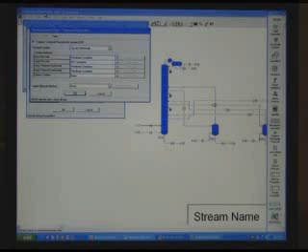Okay, so let's go back to my slides. I don't know how many more I have.

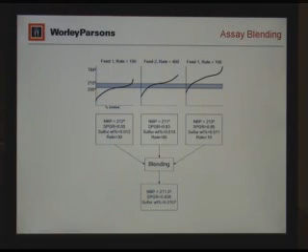So we talked about blending, and this is how it works. Amy just brought up a very important point - she said to be careful. If you do blending in PRO/II, it won't actually blend your viscosities very well, and actually it won't even blend them, I think, if you have more than one assay. I wasn't aware of that, but if you need to do something like that, call me and I'll contact SimSci. She has an open support case with them for a long time now on viscosity prediction from blending assays. It's not doing it well, and I think I read somewhere that they're using a really old API correlation to do the viscosity prediction, and API doesn't even recommend that method anymore. So be careful if you do need to look at viscosities.

So when do you not want to blend? We talked about how it would blend everything together and make you one set of cuts, but when do you want to just keep them separate as separate sets of pseudo components? The main thing is you want to differentiate between the properties. Like if you have a really light stream and a really heavy stream, you don't want to combine them and make one medium weight stream because it won't represent either of them well. So the example I gave here is if you have a low sulfur stream and a high sulfur stream, the blend would be like a medium sulfur stream, so it doesn't really make sense - it won't represent your low sulfur or your high sulfur.

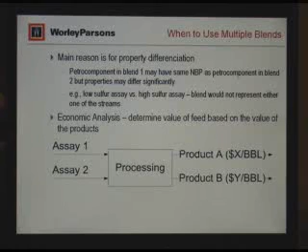The other reason is if you want to do some economic analysis, if you want to track what happens to this feed and when it makes the products, you'll see you'll get X dollars per barrel for this assay and then Y dollars per barrel for that assay. But if you were to blend them into one set of pseudo components, you can't keep track of that because you don't know where it came from. So those are some of the reasons why you don't want to blend.

Okay, so that's the assays part. Any other questions on that? I know it's a bit strange if you haven't seen it before.

Yes, the refinery typically provides us with this. Yeah, they would pay a lot for the labs to run these assays.

And I think back in the 80s, we used to have a folder with West Texas Sweet - it would have this TBP, and we had Oman and Bintulu crudes. We used to have a library of TBPs for all these well-known crudes. I don't know if we still do. Helmi, do you know? Is he still here? Okay, but yeah, we used to have a big old file cabinet, and you go through, and he was like, okay, West Texas Sweet has this, and you just pull it out and start looking at it, and we used to plot it and see if there's anything weird in that curve. But yeah, the refineries will usually provide you with that, and then you would put it in.

Okay, so we're going to talk about the column now. It's kind of a strange jump, but since if you do enter an assay, you probably will do a distillation to break it up into different products.

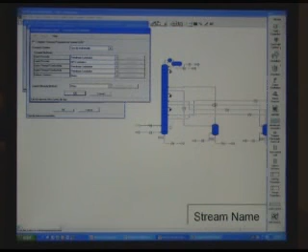Okay, so for PRO/II, let me just show you what it looks like. This is a column, a distillation column, and you can have multiple feeds on any of these trays. Like here they have 3 pump arounds and 3 side strippers. So it's hard to control right now.

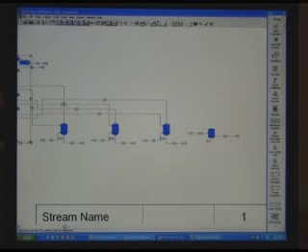And you can even have a feed furnace - we'll talk about that, model like a flash zone. You don't have to have a condenser or a reboiler - you could just have, say if you have a liquid extraction column, you just want 2 streams going in. But for crude columns, you usually do.

Let me go back to the slide. So all the stages are at equilibrium, and your reboiler is your last stage. The way PRO/II numbers it is: the condenser, if there is one, is stage 1. If not, the topmost tray is stage 1.

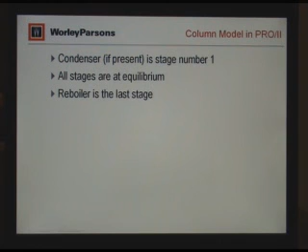This gets to be a little mathematical. There are 5 algorithms for it to solve the distillation column. There's an inside-out algorithm - you basically have 2 matrices, one inside the other, that's why it's called inside-out. The inside matrix gets solved first, and then it'll come out and solve the outer matrix.

You can't do total pump arounds on that. Total pump arounds means you take all the liquids off a stage, pump it around, and feed a stage above it, so no liquid goes to the tray directly below. You can't do that directly, but there are tricks around it. For example, you could have just one mole of liquid going to the next tray to simulate that.

If you have any vapor-liquid-liquid equilibrium columns, like extraction or azeotropic distillation, you use the ChemDist algorithm. These are just algorithms, the mathematical methods it uses to solve the column. It's not really about the types of column it has.

A column is just a bunch of trays that you lay down to simulate your distillation. There's also a SURE method. I don't know why it's called SURE, but it uses the Newton-Raphson technique with matrix partitioning. I don't know exactly what that means, but it's just Newton-Raphson, I think it has to do with root finding using some Taylor series.

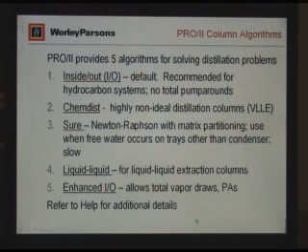Okay, so those are the basics. There are about five basic ones that you would choose from. Okay, so our given design is going to determine which algorithm we use, right? Or do you guys model it differently?

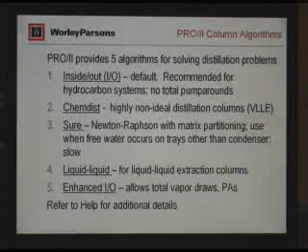No, your design will just have you set it up a little differently. In terms of Pro/II, you would lay it down and put in, if it's an existing one, whether you have trays or packing. But the algorithm is just something you pick to have it do the math, to calculate it. It's kind of, how do I explain this... it's like when you give it the specifications and all this information, it'll take those and make equations out of it, and then try to solve it.

The design is what determines how the equations are put together and run. The design, you do in terms of specifications, and depending on the degrees of freedom of the column, you can have X number of specifications, and it'll need to vary things like duties and draw rates in order to meet the specification. So yes, that does come into play that way. But these algorithms are just the math it uses to solve the columns, though yes, it is dependent on how you set it up.

But by default, it uses inside-out, and then you can go choose any of the other ones to help it solve. A lot of people just run it with inside-out, and if it doesn't solve, they'll say, oh let me try this. It's just a mathematical method to solve these matrices.

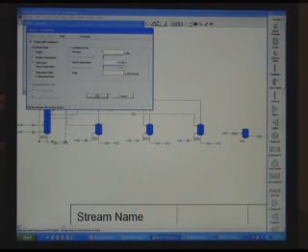So these are the required inputs you need for the column. The first time you lay down a column and drop it on the PFD, it'll ask you how many theoretical trays or equilibrium stages. That's what theoretical means. Sometimes people are picky, and if it's theoretical you should say stage, not tray, since tray is like actual. So sometimes I mix them up. But theoretical means it's always at equilibrium.

You also need to give it a pressure profile. If you're doing tray hydraulics, it'll calculate for you, but you need to give it a lot of information. You need to tell it what kind of feeds are going in and what kind of products you want out. Then specifications, like if you want an endpoint for a product, or C1 through C4 content, or RVP of a stream, or cetane index, any of those refinery inspection properties could be used as a specification.

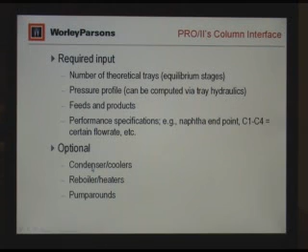And you don't have to have all these in a column. You could, but you could have condensers or coolers, reboilers or side heaters, and pump arounds.

Let me show you really fast. I'm just going to put down a column.

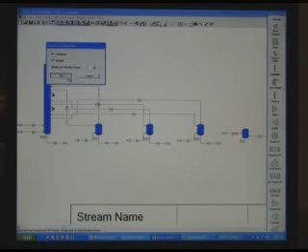So basically, you just pick a column, and then you need to give it a number of trays. Let's just say 10. And then you would feed it to, say, any tray. The way you draw it doesn't really matter. Like right here is 1, 2, 3. Looks like I'm feeding on tray 5, but it's not actually that until you go inside and tell it where you're feeding it.

And the product here, just for simplicity. You'll see that the pressure profile is red, so I need to give it a pressure profile. It could be overall, or you could give it tray by tray. So I could say top tray pressure is, I don't know, 50 pounds or something. And then you could have pressure drop per tray, maybe like 1 pound or something.

I'm just making this up as I go. Or you could give it the pressure drop for the whole column, like a big delta P. So if you say delta P is 20, then this will be 50, and this will be 70. So the pressure is higher at the bottom, so it goes up.

And you could also, if you do it by individual trays, then you have to do it here, like tray 1 is this, and tray 2 is this, and so on.

And feeds and products. So right now, as I mentioned, I just drew it so it feeds in the middle of the column, but it really doesn't know where I want to do it until I tell it here. So I could say feed it on tray 2 if I wanted to, but it won't change the picture. Okay, so you can feed it on any tray.

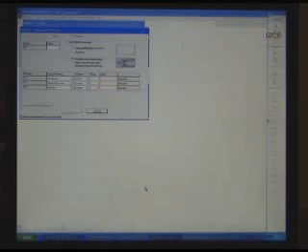Let me just show you really fast how to add a side exchanger or something. So I have a condenser, so it's blue. So heaters and coolers, I could put a heater, say, on my feed tray. I'll say 5. And give it a duty.

And again, this duty will be fixed until you vary it to meet a spec. So, I don't know, 500 BTUs or something. So it will also help you model heat leaks to the environment if you want to. And then you can give it all this information, like it could be an overall heat leak, or heat leak from the condenser, reboiler, or heat leak per tray.

And there is something called a flash zone model here. Flash zone just means you have a heater, a furnace, a fired furnace or something at that tray. And the flash zone will let you bypass that tray. You could have a liquid bypass and a vapor bypass, so that it won't treat it as another tray in your column.

Let's see, pump arounds. You could set up a pump around. It's liquid. You could give it a name of the stream, from which tray to which tray. And I think I have a slide that explains that.

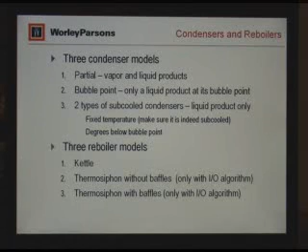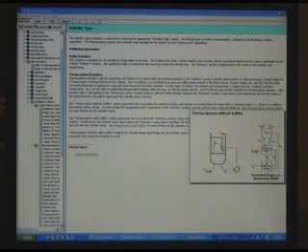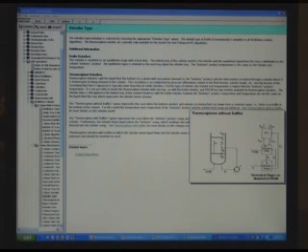If you look at it, you have a 2-phase return to the column. This will have vapor and liquid. The vapor will go to the tray above, and the liquid will come down to the bottom sump here. Then this hot liquid will actually vaporize some of this cold liquid, and the vapor will go to the tray above. So if you look at it as a theoretical stage, here's your reboiler.

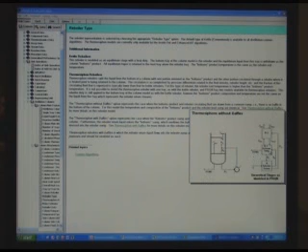This is the bottom sump, which is here. This is the bottom sump, and then the bottom's product is the draw here. So here's your reboiler return, and this is RV. This is RF - is that F? The reboiler feed. So that's the liquid going to the reboiler right here. And then the liquid return from the reboiler goes to the bottom sump, just like here.

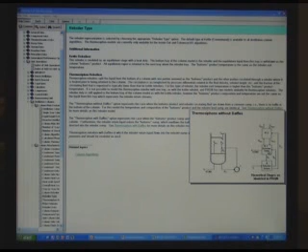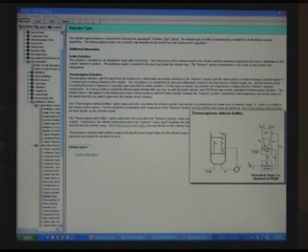So you need to add 2 stages, basically. That's what I was trying to show you, to model a thermal siphon. Now if you have what they call a once-through thermal siphon, mathematically it's the same as a kettle, so you just need one theoretical stage for that one. It's called once-through thermal siphon.

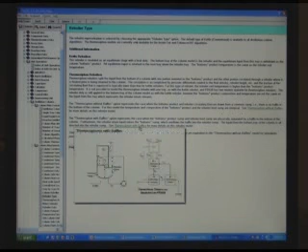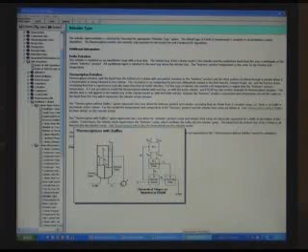And if you have a baffle at the bottom of your column, it's a little more complicated now, because then you have this overflow going to the reboiler feed sump. So you need to model it like this. But as long as you choose thermal siphon with baffle, it'll take into account all these. It's just trying to show you a graphical depiction of what it's going to calculate.

Let me show you how you would choose that. You would come up here, and if you have one without baffle you choose that, and with baffle you choose that. You need to give it some specifications once you choose the thermal siphon reboiler. So you're saying that if you specify, say, thermosiphon without baffle, will it automatically assume the reboiler is a certain number of trays? Or do you have to add extra trays to your column to get the number of trays?

Oh, okay, this is more for if you're translating an existing column with a thermal siphon. We'll have that exercise at the end, but like if they have a thermal siphon reboiler on the column and you need to translate it into theoretical stages, you should add 2 for the thermal siphon.

So say you have 10 trays in real life with a thermal siphon, and say the efficiency is 50%. Okay, so you would translate it to 5 theoretical trays, but then you add 2. So on the column you would have to have 8 trays, is what you're saying. Right, 5 trays, and then 1 for the condenser and 2 for the thermal siphon.

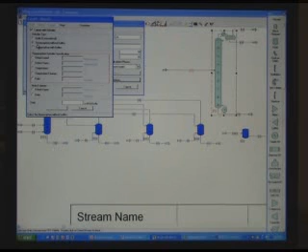So even though you specify thermosiphon, it doesn't automatically assume that that's going to take up 2 trays. Right, you would have to manually add the 2 trays. So like if it were a kettle, you just count it as 1. But because of the way the liquid sump comes into play there, and there's some more equilibrium happening because of the hot liquid coming back, you would need to add an extra tray - or stage, I should say, stage.

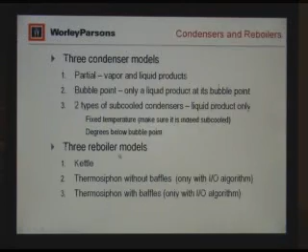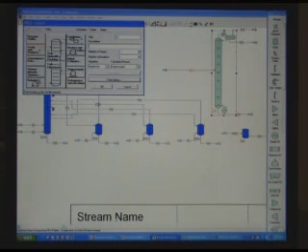If you have heaters and coolers, you could put them on any tray. If it's positive, it's heat, and negative for heat sink. And the flash zone data you could provide if you have any fired heaters for a tray. I think I showed you that a little bit, but let me show you in more detail.

Oh, well, okay, I'll give it 1. 5. Yeah.

And this is where you can give it an efficiency for the heater, and then specify how much of the liquid you want to bypass the flash zone.

Let me see if there's a diagram of the flash zone. I don't have very good tools to draw, so I didn't draw it because it was going to take me like a whole day. But I think I saw something in the help that has it. Flash zone data. That's all I found. But basically, you're just specifying the amount of liquid that you're going to bypass on that tray, because that tray is not really part of your column. You don't want to have any separations happening there. You just want to bypass it, so you go to the tray below. That's all it is.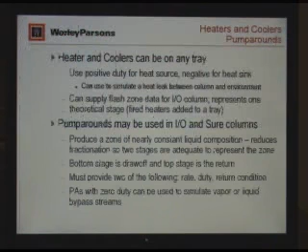So when you do have a pump around, that entire zone where the liquid is drawn, cooled, and pumped back, say you have 4 trays there. On those 4 trays, you're going to have about the same liquid composition, because there's not much separation. There's no gradient in the composition for it to do any separation. So you're going to have about the same liquid stuff, so you would just model it with 2 stages. The bottom stage is where you draw off, and the top stage is when you return it. So it doesn't help you much if you put trays in between.

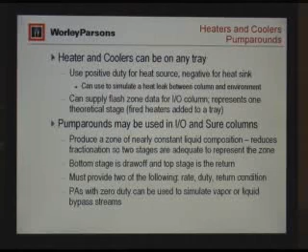You need to give it a rate, like how much you want to pump around, and what's the duty, the cooling duty, and how you want it returned. You can only do 2 of the 3. You could say the temperature coming out of my pump around cooler is X, or you could give it a duty and it'll calculate the temperature, with the rate, of course. And then you could actually have 0 duty on that pump around, just so you can bypass some trays. You could just say, pump all the vapor from here, or half the vapor from this tray to the tray above, and bypass.

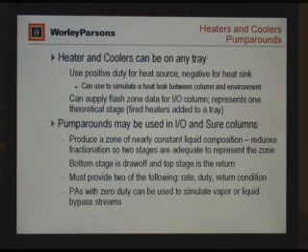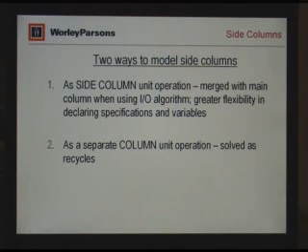Side strippers or, what's the other one, strippers or fractionators? What do they call it? Rectifiers, sorry. Side strippers or side rectifiers can be modeled as part of your column. You actually pick it off the side, the unit ops, by picking off side strippers. So I did a main column there, and there is a side column.

Then you would just lay it down and give it the number of trays. By default, it gives you 2, and you could have a condenser or reboiler. Let's say I have a reboiler. Sometimes side strippers, like this, are steam stripped, so you won't have a reboiler, you have steam.

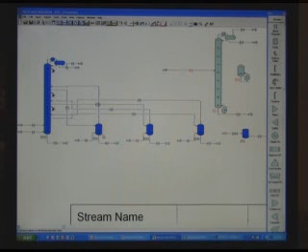And then what happens is when you connect them, PRO/II will merge the column, so for this case, you don't have like 4 columns to solve. It actually solves it as one huge column. And you can combine your degrees of freedom and make the number of specifications based on that.

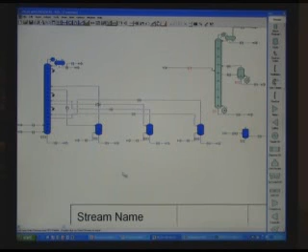Let me show you. Let me just go in here. Actually, let me get rid of my stream. Let me do this one that's already been done, so I don't have to randomly pick numbers. So this one has a pressure profile.

They gave it the condenser, and then the very top tray, and then tray 18, which I think is the feed tray right there, and then the bottom tray. Whatever you don't give it, it'll be linearly interpolated for the pressure drop.

This condenser is actually a subcooled condenser at 110 degrees Fahrenheit.

And because it is a big matrix it has to solve, sometimes it helps to give it initial estimates. If you don't give it initial estimates, it does have initial estimate generators, and I didn't go through all that. There is actually a whole section on what initial estimate generator you should use and how you can pick the right one to help you solve your column.

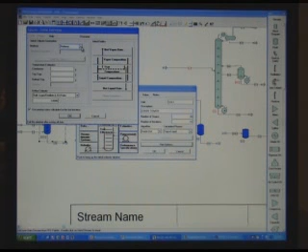But again, it's all math, and hopefully you don't have to deal with that, unless when you do a real column and you get stuck, then you could get help from me or call support. But there's a whole section there, like the chemical method, how to generate the initial estimates, refinery, and conventional, and it basically uses Newton-Raphson and other mathematical methods to come up with an initial matrix to solve.

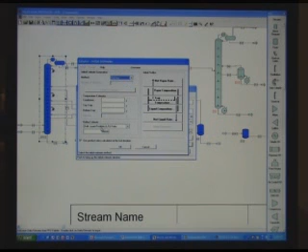So this one, what did they do? They changed it to a refinery. That's why it's blue, but they didn't provide anything else. Yeah.